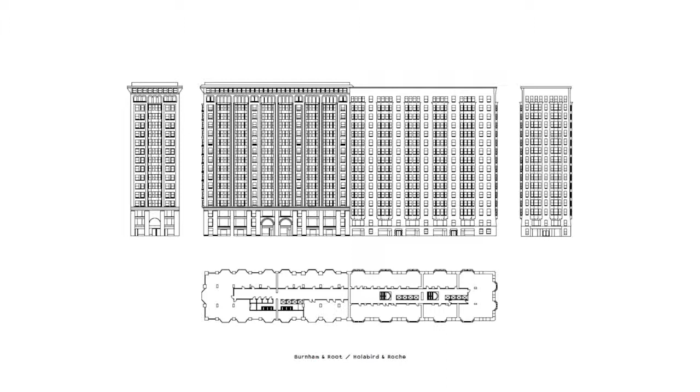It has a steel facade, a complete steel structure, more open windows. But the older part has almost no ornamentation. All the ornamentation comes from the shape itself, like the plinth, which is like a big belly sticking out. If you look at the oriels here, they are super plastic, with special bricks bending into two dimensions. The depth of the windows, all these things give it expression, a very special expression.

We are also more in love with this part of the building, by the way, than the newest part. And look, I have to stop talking about this building now, because I always tend to give a lecture about this building instead of our own work.

But look what happens here: over 16 floors, in the plinth we have a very sharp angle, and then it gradually goes all the way up and gets rounded. That's quite special, and of course it's a type of decoration, but it comes from a completely different understanding. It's actually the idea of embracing the past and embracing contemporary architecture, trying to obtain a product which doesn't engage with just one of them, but simultaneously engages with both. That's what we try to obtain in our buildings.

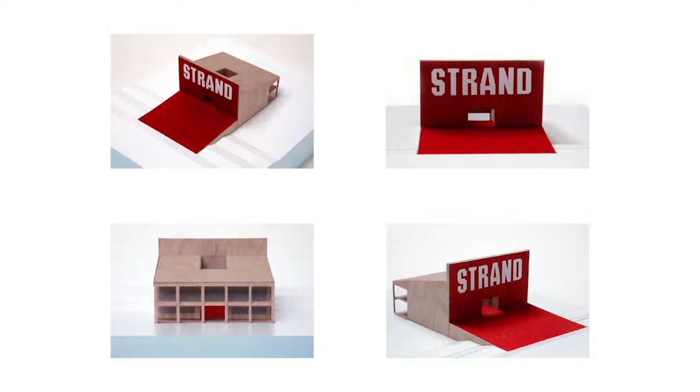For us, it was very important to make a pavilion which would have a face towards the city and a completely different face towards the beach itself. So to the city, it needed to be big scale and brutal, part of the aggression of the city, while on the beach it needed to be intimate, small and delicate.

It's also a temporary pavilion, so it's only there for 4 months during the summer, and then it gets detached and sent away to storage. It was built up twice.

So we have a large billboard facing the city. Strand means beach, so it makes clear what's behind the pavilion, and it's the entrance gate to the beach. We looked at typologies like this of a gatehouse. That was also in the brief: make an entrance to the beach which makes it clear that the beach is there.

But we were also completely intrigued by these pictures of Berenice Abbott of New York, where you see these wild publicity signs actually completely taking over buildings, or influencing them at least, and the paintings of publicity signs on buildings. So for us, here's really taking over—it's like twice as big, or here.

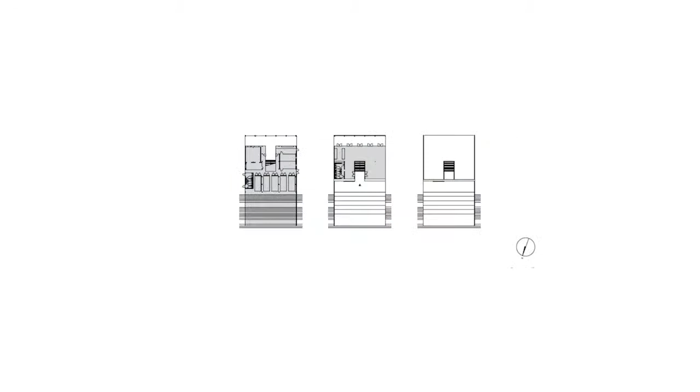This is the plan. Very simple plan. And the section, as you can see, it has a large square, you could say, with stairs in front, because there were stairs here and we could not build on these stairs on the pavement.

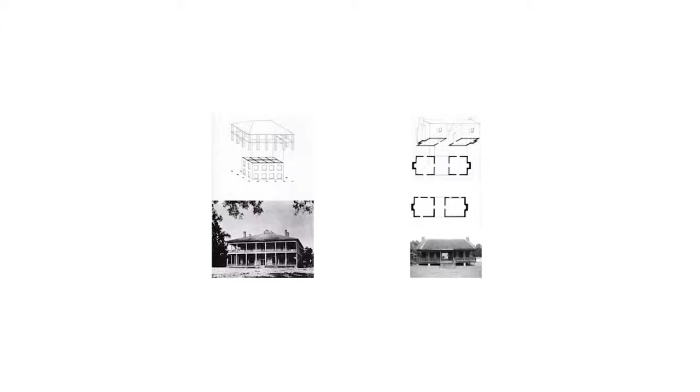We were also influenced by this book of Steven Holl, Rural and Urban House Types, where he shows typologies like a house completely surrounded by a porch, or a dog trot house. We used elements that we reorganized in such a way to build up this very simple pavilion.

And like I said, it got rebuilt twice, and then they used it for a third time at a flower festival, and I think it got lost now somewhere on the camp terrain—we actually do not know where it is anymore. That's also what happens with temporary buildings. Of course, at a certain moment, just like children, you have to let them go.

Now, this is what happens in the cityscape. Now, the second project that I would like to show, and that's the second out of 4, that's Royal Tichelaar factory. That's one of the oldest companies in the Netherlands, and it's a ceramics factory.

It actually contains two acts. The first act, you could say, is the restoration and extension of a factory hall where the production was taking place. It's a very small village in the northeast of the Netherlands. This was the existing factory hall, and the client came to us with a question.

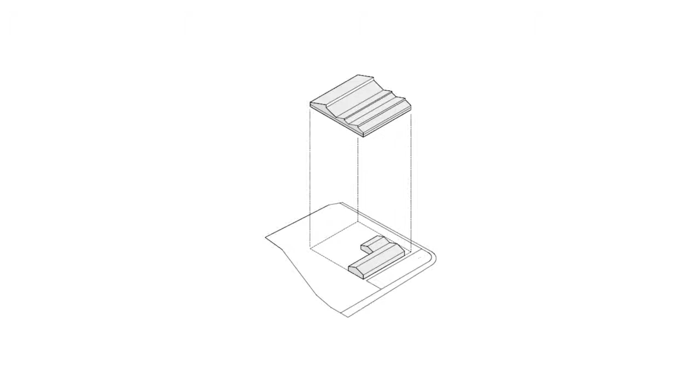So with the limited amounts of means that were available, we thought, what is now the typical character of a factory? That's of course the sheds, and then we tried to make a family of sheds because we had to anticipate the existing structure with its own rhythm, and by just pulling up these roof lights you would actually get quite a characteristic silhouette.

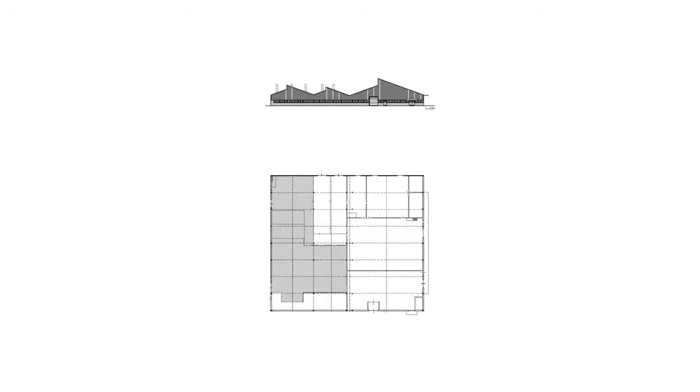And this is what it is, containing two colors. You have to imagine that this ceramics factory gets its clay, dirty brown clay, like you see in the plinth. These are bricks, stored on the terrain. They go into the ovens with a shovel, get baked in the oven, and then they become orange. That's what the roof color is about.

Now, it's a very simple utilitarian building. Perhaps there's not even a lot of architecture about it. As you can see, the interior is for production. It's hard, it's dirty, and it's also noisy.

There's only one room that's the most precious room where all the architects want to go, because that's where they have all their samples stored. During the years, they noticed that the architects visiting this room were so enthusiastic that I thought, perhaps we should invite everybody into this production facility instead of our offices, which were a bit further away.

Because these offices, that's the second act, were housed in this beautiful old complex of original, authentic houses, and they thought, let's bring everything together, and that meant a completely new question. It meant that this hard environment would suddenly also have a representative character.

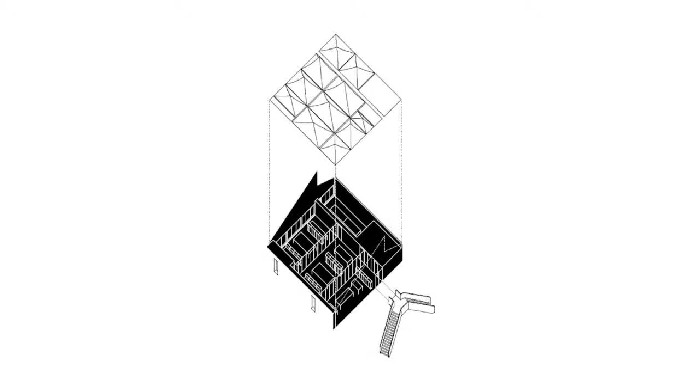This illusion of making a tent attracted us, and we thought perhaps that's the best way to change the atmosphere of these offices that needed to be housed there.

So the first thing we did was making a big monumental stair on the outside, and then we proposed to make a roof out of tents. As you can see here, the geometry of the existing shed is of course still there. And the nice thing about these tents is that they actually divide the light in a very elegant way.

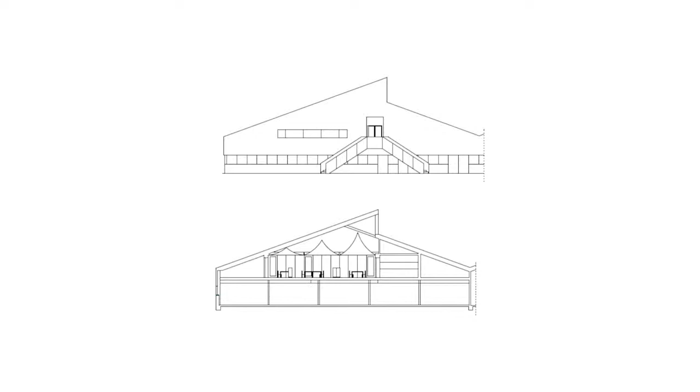So here you can see the tents again, and it's quite a simple plan. You enter here, and then you have an open office floor and separate meeting rooms. The stair is actually hanging on the door and standing on two points, containing the same colors that we used before.

We made models to test the heights of the tents, and this is the result. The nice thing of these tents is that, like I said, they divide the light, but they also make you forget everything that is behind it. So all the steel, all the pipes, all the ventilation, the lamps, all the things that we were not so sure of, because they belonged to this other world of utilitarian things, were covered, and the textile of the tent actually allows you to ventilate right through.

And then we were also invited to think about the cabinets. So we designed the tables and the cabinets as well. And the cabinets are covered with felt, and as you can see, it's a very transparent setting.

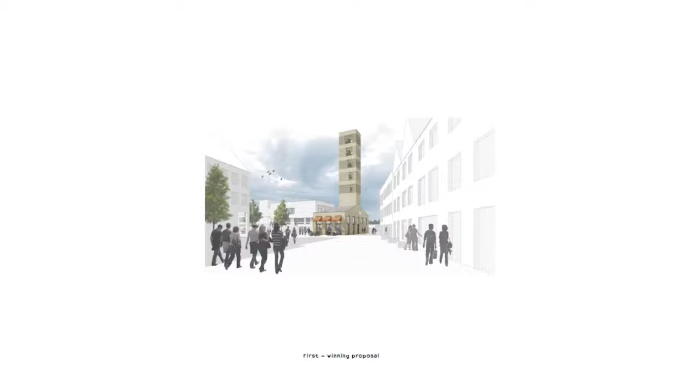Gradually it became clear that we had to be simple, making, of course, loads of models first before we could make such a decision. And we won the competition with this entry, which is a very tiny house with a large chimney. And the chimney contains the carillon, the clocks that were standing on the parking place.

And it's a bit similar to what Ollie and Thomas just told. Everybody was happy. We were happy. The client was happy. The municipality was happy. There was only one person that was not happy, and that was the urbanist.

He said, I want a big tower. And the project developer said, well, a big tower means apartments, and in this small village where everybody lives in a house with a garden, I cannot sell apartments. And the urbanist said, I want a tower.

And then the project developer, the client, called us and said, architect, if you don't want to lose your commission, you have to solve this. Because otherwise we're not getting there.

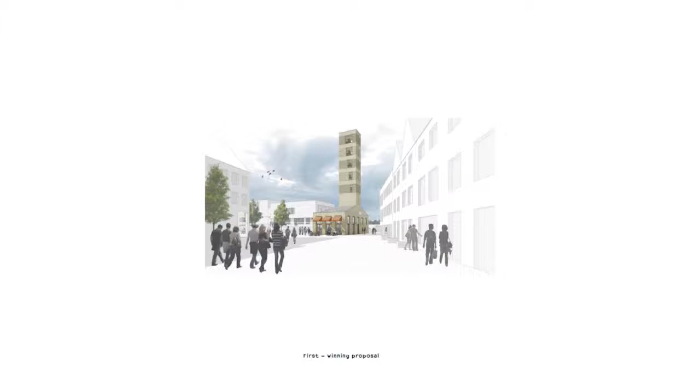So we had to completely rethink our contribution, our winning proposal. And I'm very happy with that, because I find the longer I look at this, quite a boring design.

So what we did, we had to rethink about what we were actually doing there in this small village square, because it needs to be a landmark, and all the small villages surrounding it have their own market square and church tower, but this village is too new to have a church tower. So we had to think about and define the typology of what this new building could be, because what is a landmark?

And then we found this tradition of trade buildings on every market square in the Netherlands, and I think also in Flanders, and perhaps also in other places, I think also in Germany. And these trade buildings, they are quite specific. They have a beautiful proportion of being too narrow and too high.

They are richly cladded with all kinds of beautiful decorations, most of the time also very un-Dutch material like natural stone, limestone. They most of the time are freestanding, and they contain quite a specific interior organization of a very high ground floor, where the weighing of the goods took place, and then one room upstairs where the people were counting money, let's say the administration.

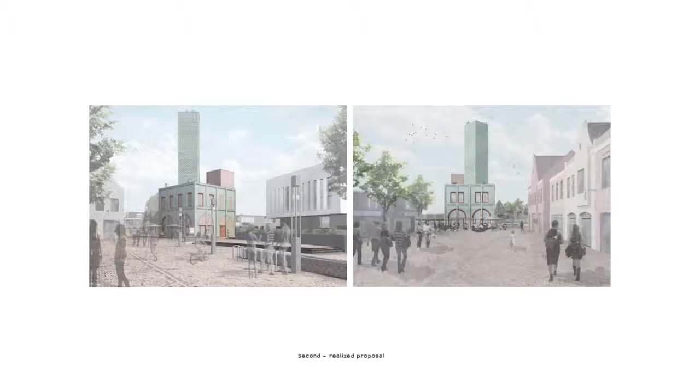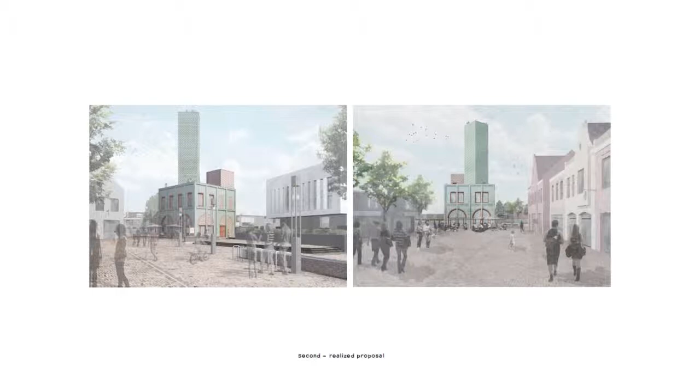Now that helped us a lot to say, hey, perhaps our building is more like this typology. And then we made a second proposal where we said we make a house which is, let's say, more vertical, that has more monumentality, that wants to be bigger, but yet tangible, touchable, and understandable as part of the scale of the village. And on top of that, we stack 2 towers, and these towers, they need to be visible from far away, so it's allowed to make them abstract and to give them another language.

The local or traditional material in this area is brick, and there used to be a lot of small brick factories, and the request from the client was also to use a local brick. But we found out that all these local companies were actually taken over by a large German brick company, so we felt free to choose from German bricks also.

And then we actually decided that it should be part of this, you could say, area of brick buildings, but it should also contain its status apart. Now, this is the figure of the tower, where you can see that it's a square with 2 towers on top.

We saw this image and thought, imagine that you enter this lower house and you're being welcomed by a bar owner, and the bar owner tells you you can go up. So you can control who's going up and down, and then you go up, and you want to go all the way up, but then you're not experiencing any climax or building up of a vertical narrative.

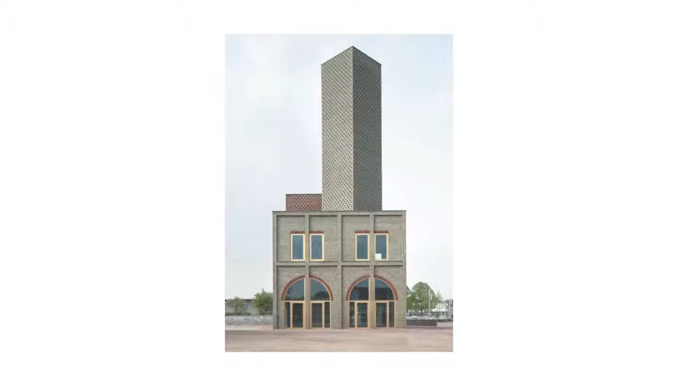So we did the same. We stacked two towers with a different language. Now the color is homogenizing them again. And then we did something else.

We chose, and that's a correction of what I said before, we chose a red brick, but we started painting with the brick. And we did something we were told never to do, because you have to be honest with bricks, that's what we learned, but we are being very dishonest here.

The bricks are put in a bucket of green slurry or cement, so one long side of the brick is covered, and one short side is covered with green slurry, but it's a red brick. So sometimes we reveal the red brick, and in other parts it's just covered with this green cement. This cement and color, when it's dry, becomes almost fluorescent green, and when it rains it becomes a bit more grayish. So it's really alive, and that's something we really like.

And then we used all kinds of local patterns that we found in the surroundings, patterns like the diagonals, things to actually give the windows more character, like a lintel. And we also added plasticity to the facade.

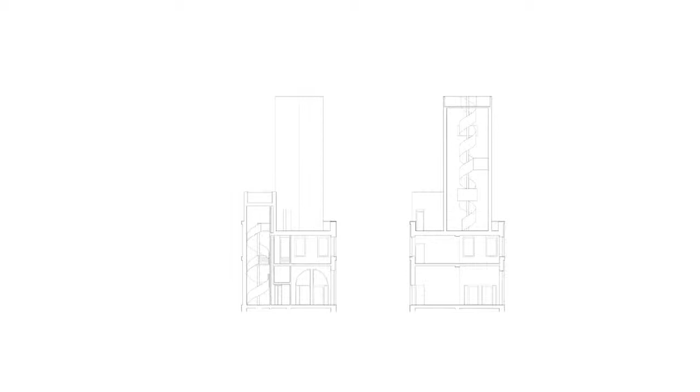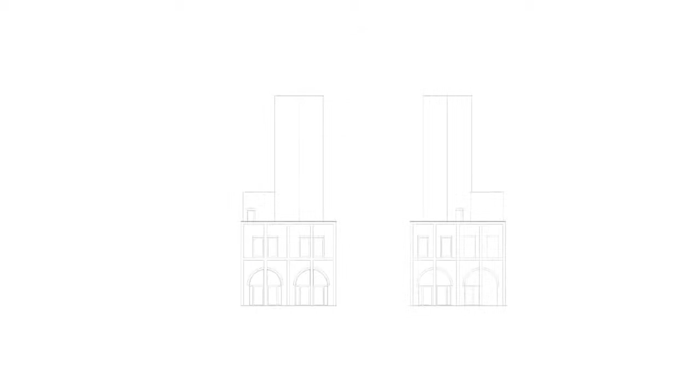Now the windows, we wanted this to be a building that is joyful. So we thought, let's provide window frames that are not only flat but also very graphical, and also give them a bright color. So they're gold anodized window frames. And this is what we did with the patterns, these are all local patterns that we found.

You could say this is the only very exotic one, which we call a Brazilian bond with open bricks, which allows the wind to pass through.

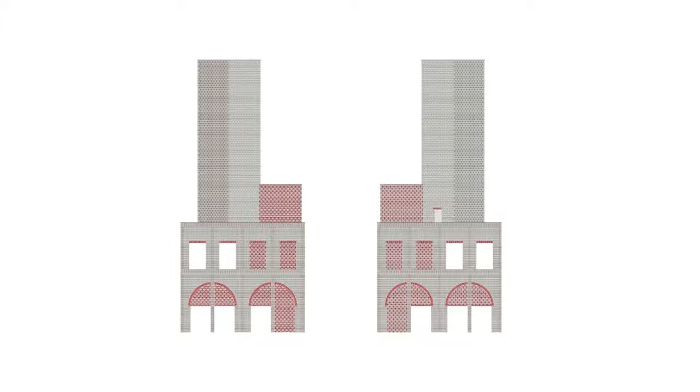We made all kinds of very subtle changes when you go around the corner. As you can see here, the pattern switches from red into grey, and we maintained continuity by making blind windows. As the arch disappears, we wanted to keep the rhythm of the arch, so we made decorated surfaces.

And this is how it appears. People first thought, the first reaction of the inhabitants of the village was that it is a mosque. We were very surprised by that, because we did all these efforts for putting in so many local motifs. Gradually they started appreciating it, also thanks to architects, because they get a lot of visitors who are architects in the village now.

Here you can see again the flipping of the pattern going from grey to red. And this is what you can see when you go all the way to the top. You can see the church towers of the surrounding villages.

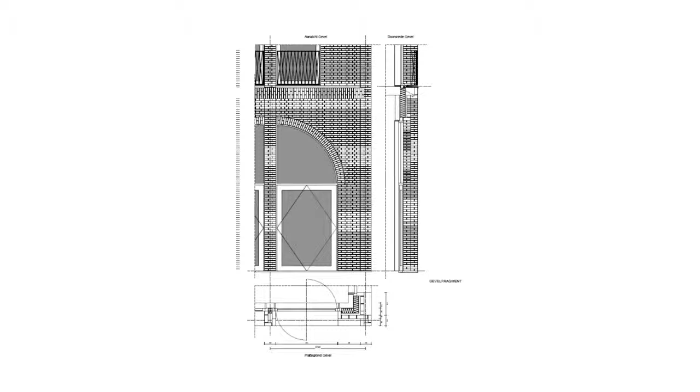So you have a kind of lintel here - how do you pull the lintel around the corner? We looked at one of our favorite architects, Giovanni Muzio in Milan, and how he pulls a lintel around the corner. But he's actually playing a bit of false tricks, which is also good, but in the Dutch climate that's really a bit harder, because there's only one brick here in the end, and in the Netherlands that would freeze off, so we had to come up with other solutions.

And by now the inhabitants actually feel quite comfortable with it. We hope that it turns beautifully old, like a ruin that we found in the village of Bergen on the other side of the provincial road. On the cemetery, there's an old church tower containing all kinds of beautiful brick bonds, which we did not see during our design.

The last project is the Atlas House. That's a recent project that we built in Eindhoven, a city in the south. Eindhoven is an old industrial city where the lighting company Philips started many years ago, and in this old industrial quarter, they are now transforming that into a living area.

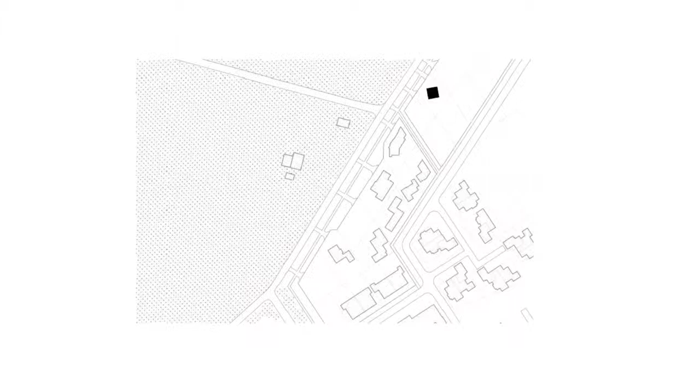I've seen the tower houses of Tom, and of course it's a hard comparison, but at the same time, if you look at the proportions, it's narrow and it's high.

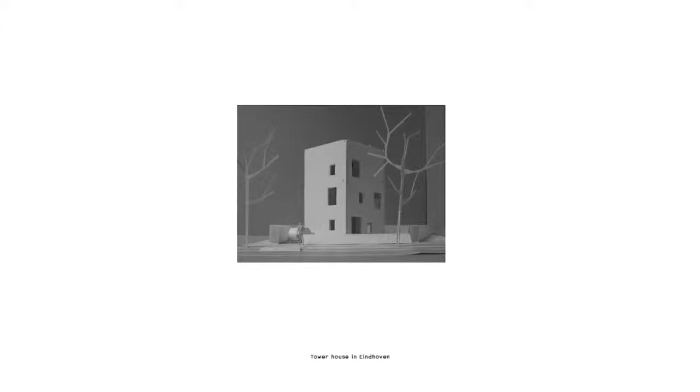We decided, together with the clients, to make a house that is as compact as possible with a very small footprint of 8 by 8 meters, and divide the living space over 3 floors with a roof terrace on top. We made this impression early in the process, when things started to become clearer about our intentions.

We made a very simple house, and we tried to make sure that every side of the building would build up its own mask. For us it was intriguing to make something accommodating, solid and heavy, while simultaneously being light and open.

So what we tried to avoid was gathering the windows or binding them together. We tried to push the windows as far as possible to the sides of the house, so the windows are always touching the corner to the maximum, so to say.

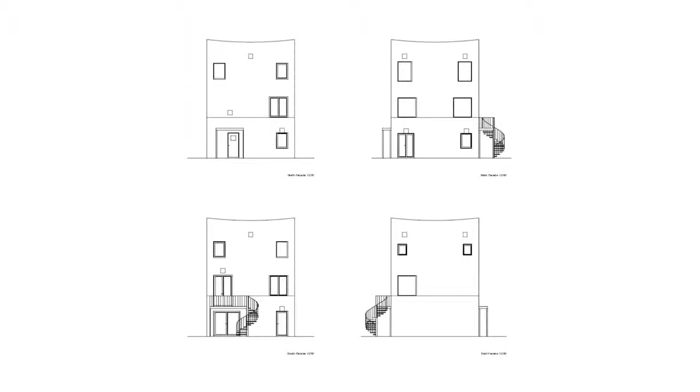The other thing we did was having many discussions with the clients about turning the house around. In the beginning it aligned with the street and the estate, and at a certain point we proposed turning it 45 degrees, because looking straight into the woods would give you something like a painting of leaves, but not sufficient depth. By turning it, the diagonal idea of the building would increase, letting you look along the lines of the forest, giving much more depth and air. That took us about half a year, and in the end it worked.

The building is very simple, and the plan is also very simple. We have a serving zone and two main rooms that are connected. It's actually a collection of rooms, with a staircase in the middle which we also call a room, and the plan is repeated over 3 floors.

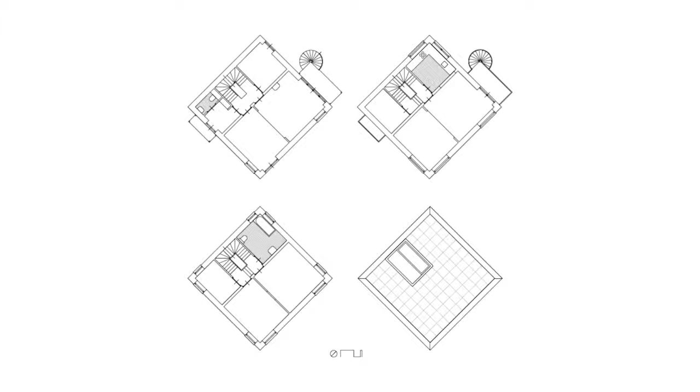You would assume it's all a bit the same, but for us the big joy is in the section, because there we started to manipulate the heights and give every floor, and every room, a different identity as you move up. That also means on every floor you have a different relation to the windows—sometimes high, sometimes low, sometimes offering more privacy, sometimes exposing you completely.

There are some elements not placed yet, like a balcony here, because this forces you to rethink the whole way of living when dividing it over 3 floors. You also have to imagine this tiny plot would soon be surrounded by other villas very close by, so the garden would not be the most private part of the house anymore.

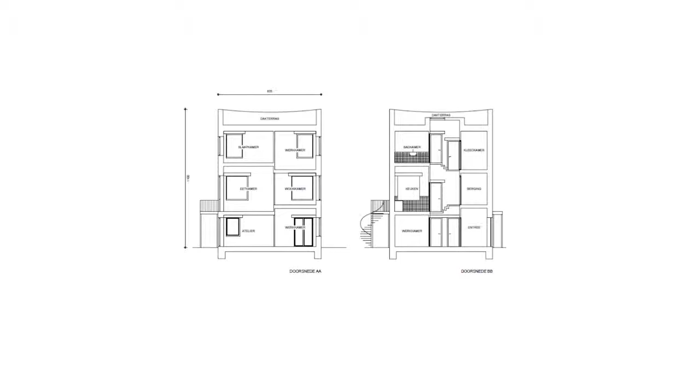The higher you go up, the more privacy you get. In the end, it's the roof terrace that makes it possible to be fully naked up to that point, gaining the most privacy—that's the free zone. You would be between the crowns of the trees, celebrate your house, and do your barbecues there.

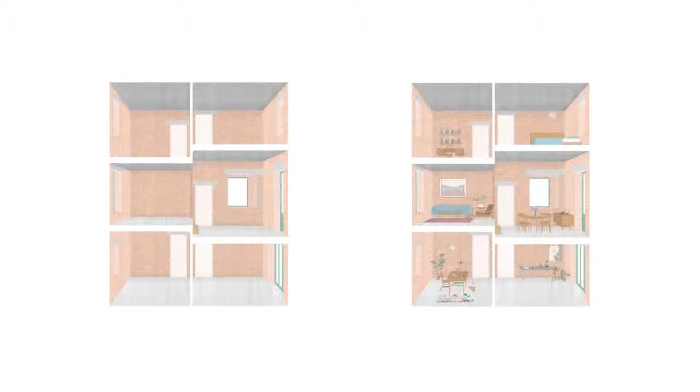Here you can see the idea of bringing the exterior into the interior. That started with a very direct idea of using one big insulated block, but we found it would lead to restrictions concerning the building permission, so we separated it into 2 layers which would still appear the same. There are high bricks—I'll show that in the next slide.

The brick is a double high brick, and for us it was a way to give even more mass to the plinth. It's one material all the way up, and we wanted to think of obtaining plasticity and a narrative about a classical language of building up a plinth and a top. So what we tried to do, we kind of are like in the landmark building, where you see we use more layers, like a grid in front.

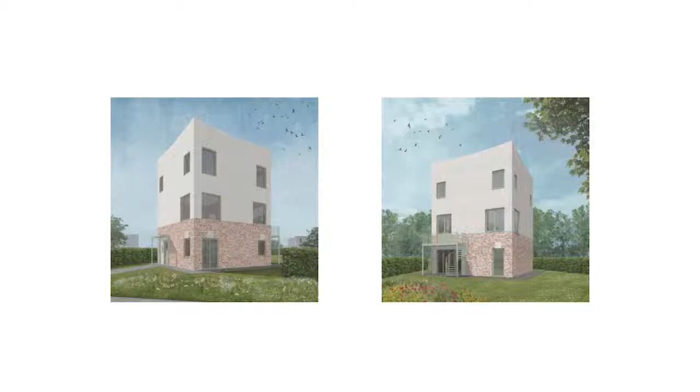This is what we test on the way down. And for us, it's a very interesting way to think about this - only adding one layer to a building could give meaning to the building. So that's what the ambition is.

You can also see that the inside has the same rhythm and the same color as the outside, although it's a slightly different brick. And the joints themselves are actually bulging out - they form a layer on itself.